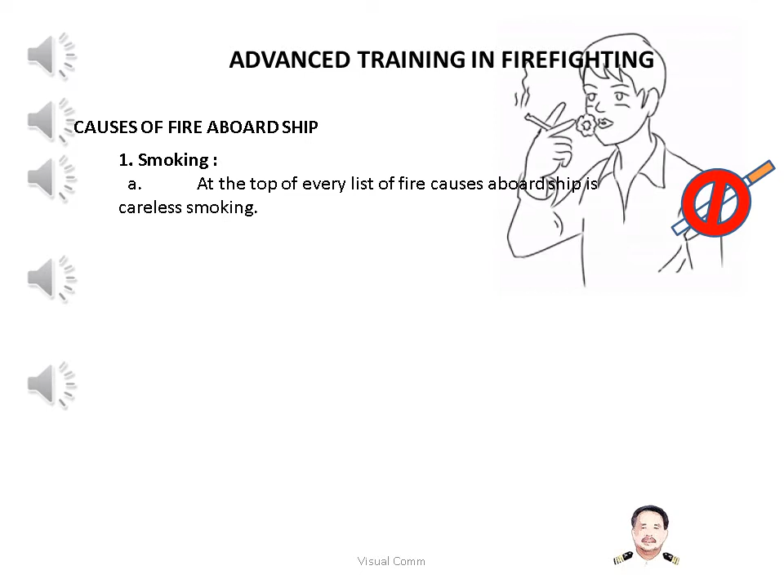1. Smoking. At the top of every list of fire causes aboard ship is careless smoking - careless disposal of lit cigarettes, cigars, pipes and matches. Smoking in bed is dangerous at any time. A smoldering fire can be started just by touching the glowing cigarette to the bedding. The resulting smoke can cause drowsiness and possible asphyxiation before the fire is discovered.

Open flames and glowing embers can be very dangerous in certain parts of the ship. Smoking must be prohibited in these spaces, and they should be clearly marked as no smoking areas. Smoking in cargo holds and weather decks when the hatches are open is strictly forbidden.

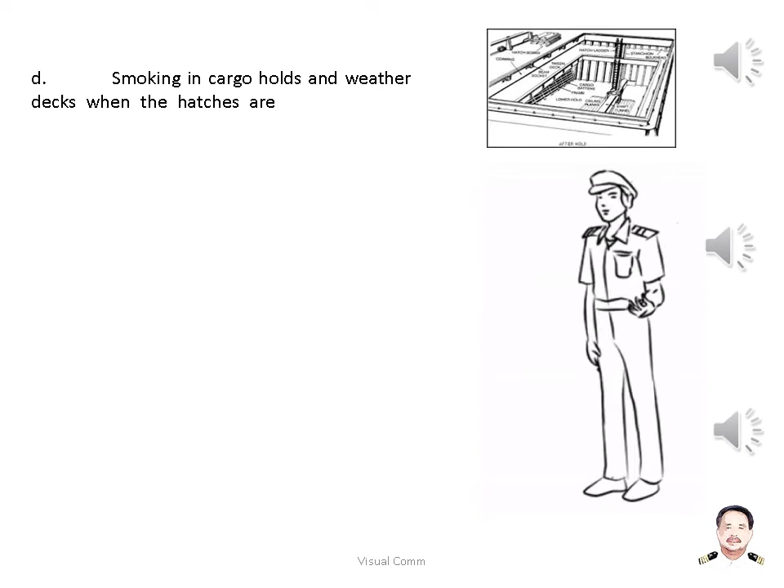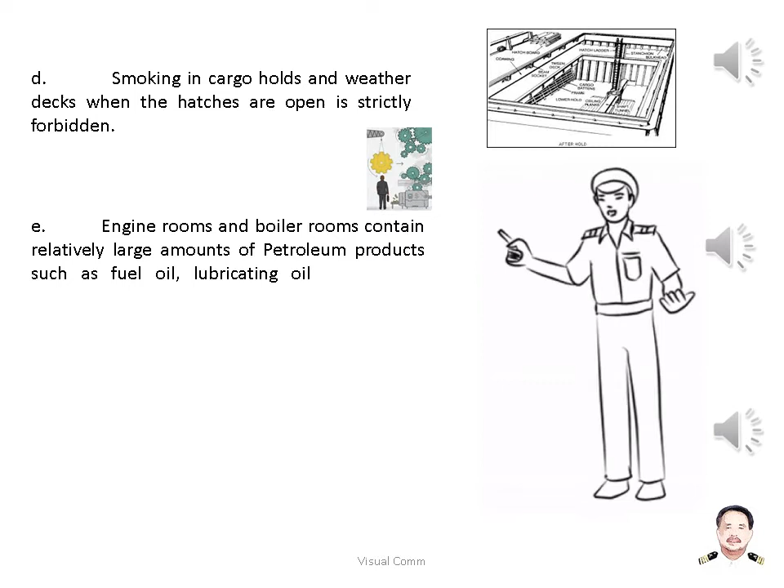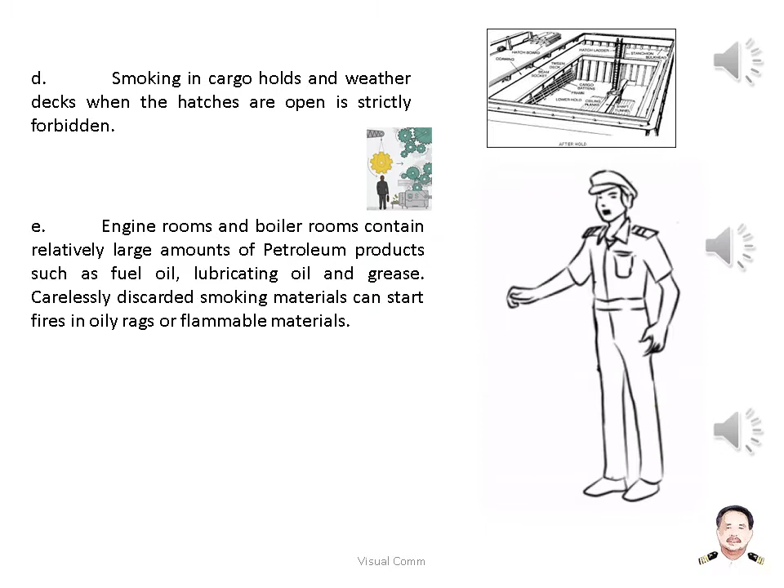Engine rooms and boiler rooms contain relatively large amounts of petroleum products such as fuel oil, lubricating oil and grease. Carelessly discarded smoking materials can start fires in oily rags or flammable materials. Smoking should be prohibited in storage rooms and workspaces. These spaces contain large amounts of flammable materials.

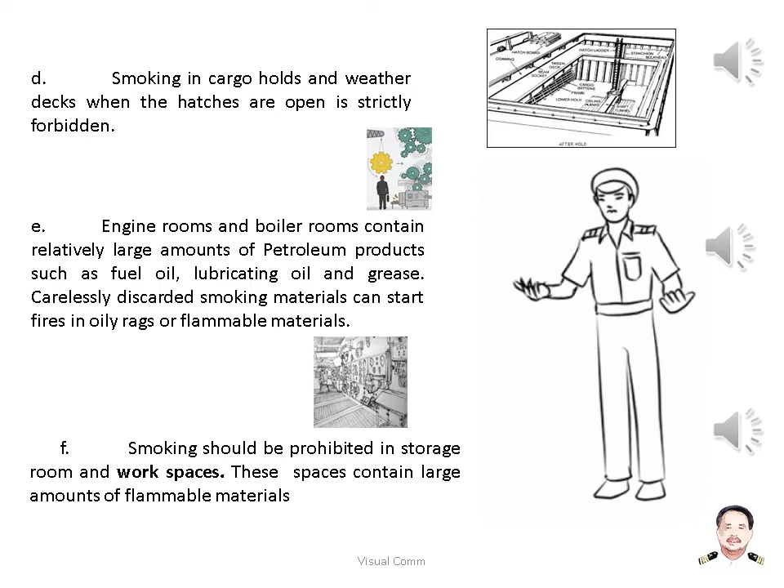2. Spontaneous combustion occurs when the heat of slow oxidation is confined until the materials reach a temperature sufficient for ignition. An example of this is when a rag soaked in oil is left discarded in the corner of a workshop or engine room. If the area is warm and there is no ventilation, the oil in the rag starts to oxidize and reacts chemically with oxygen. Oxidation is a process that produces heat.

3. Cargoes. Many materials that are carried as cargo are subject to spontaneous combustion. Ignition occurs through the chemical interaction of two or more substances, one of which is often air or water. Metals sodium and potassium react with water, and must be segregated as flammable solids and labeled dangerous when wet.

Metal powders such as magnesium, titanium, calcium and zirconium oxidize rapidly in the presence of air and moisture. Keep dry and segregated as flammable solids and labeled dangerous when wet.

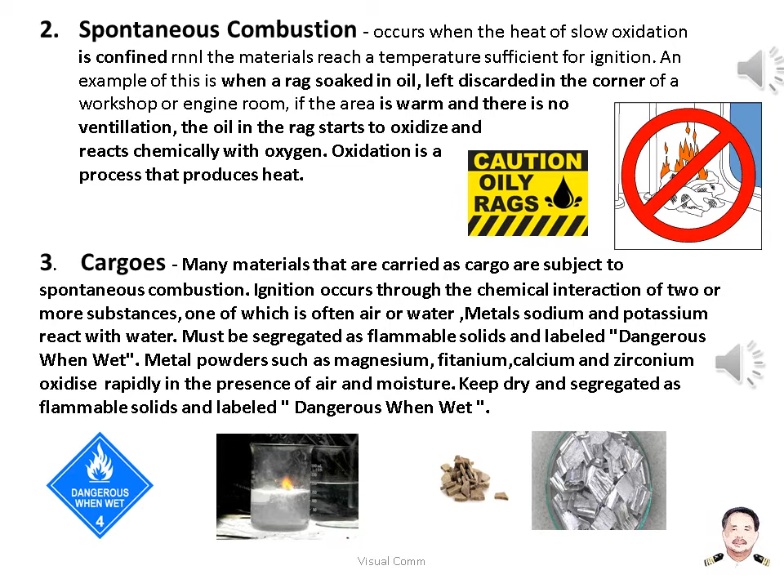4. Faulty electric circuits and equipment. For properly insulated and wired equipment, electricity is a safe and convenient source of power. However, when electrical equipment wears out, is misused or is poorly wired, it can convert electrical energy into heat, thus a fire hazard.

5. Jury-rigging electrical outlets to serve additional appliances, particularly in crew's quarters and galleys, is a dangerous practice. The wiring in every electrical circuit is designed to carry a certain maximum load. When the wiring is overloaded with too many operating appliances, it can overheat and burn its insulation.

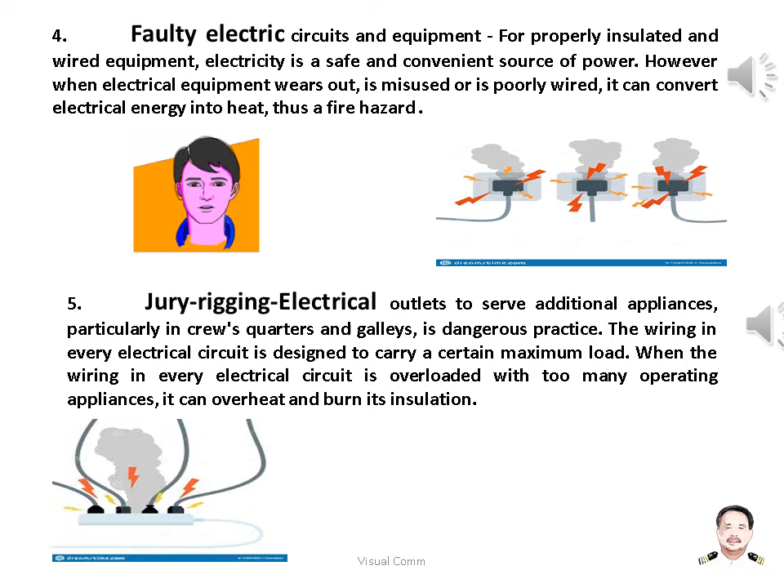6. Cargo stowage. Even the most dangerous cargo can be transported safely if it is properly stowed. On the other hand, supposedly safe cargo can cause a fire if carelessly stowed.

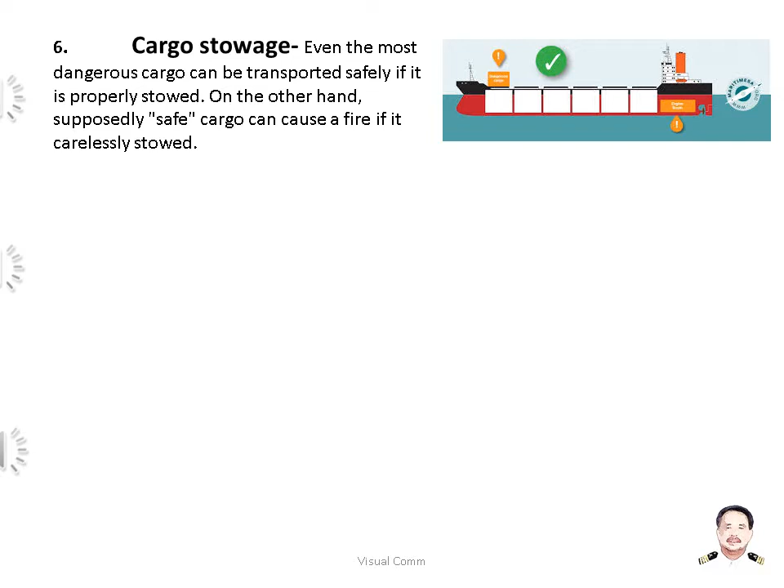7. Loading and unloading operations. These should be supervised by the deck officers. Leaking cargo should be rejected immediately. Remember, a vegetable oil that leaks onto baled cotton or rags could cause spontaneous combustion.

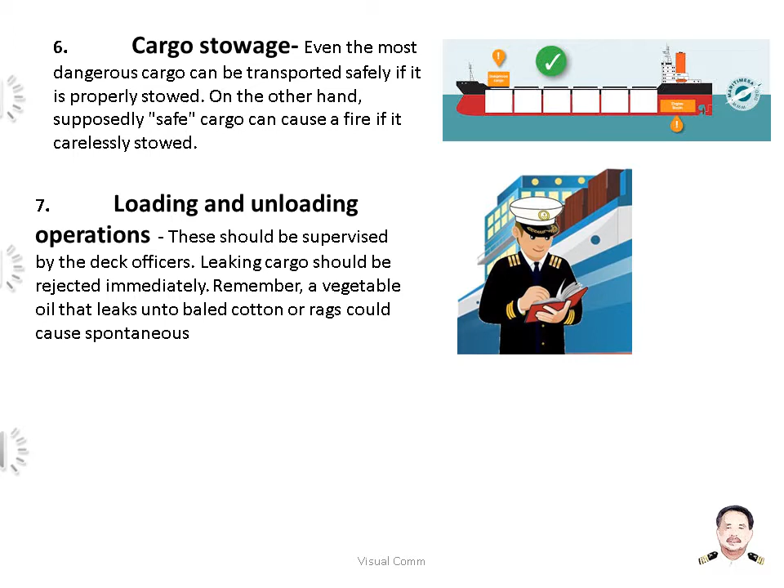8. Galley operations. The galley is a very busy place. The intense activity, long hours of operation, the many people and the basic hazards - open flames, fuel lines, rubbish and grease accumulations - all add to the dangers of fire. It is extremely important that the galley must never be left unattended when it is in use.

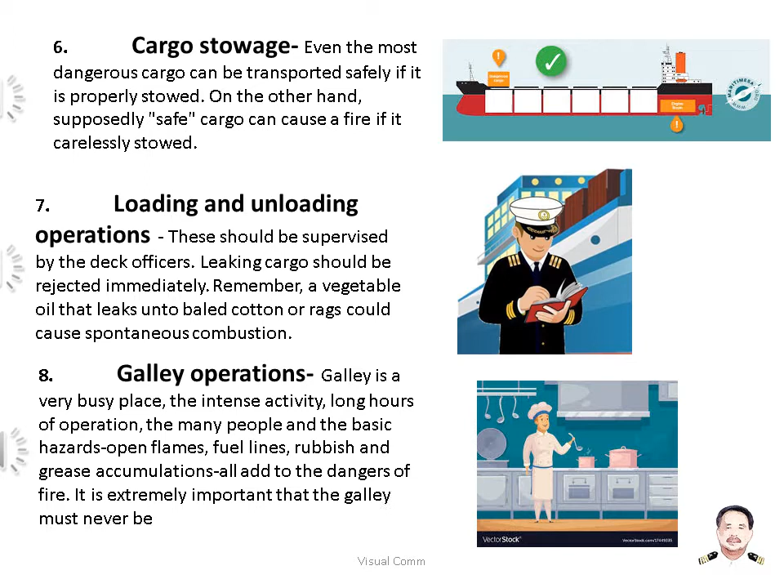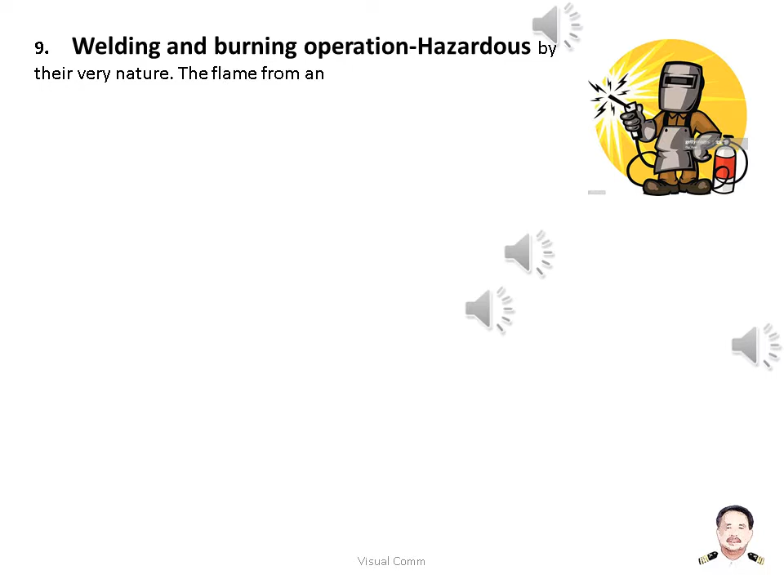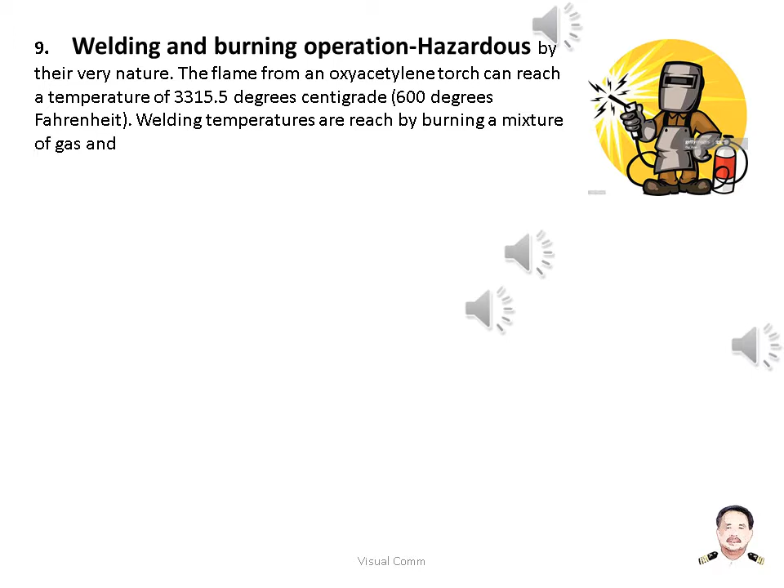9. Welding and burning operations are hazardous by their very nature. The flame from an oxyacetylene torch can reach a temperature of 3,315.5 degrees centigrade (6,000 degrees Fahrenheit). These high temperatures are reached by burning a mixture of gas and oxygen or by using electricity. The high temperatures, molten metal and sparks produced in welding and burning operations can be an extremely serious fire hazard. A fire watch must be maintained during operation.

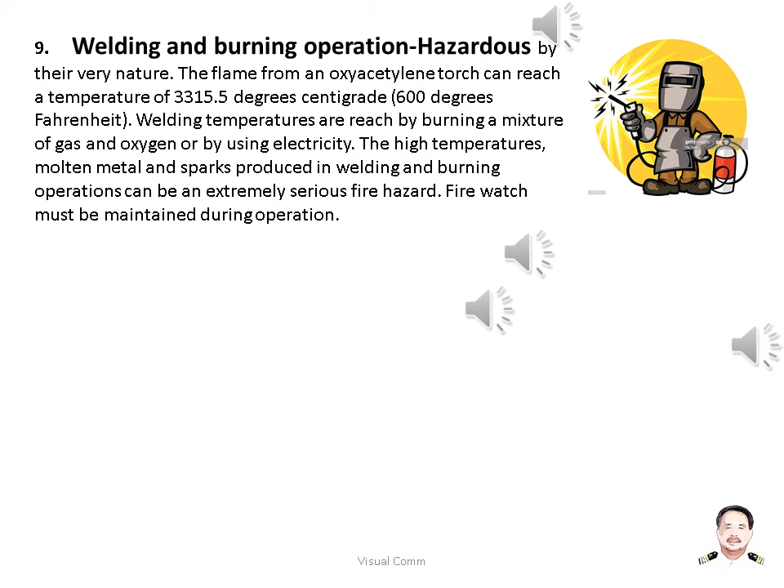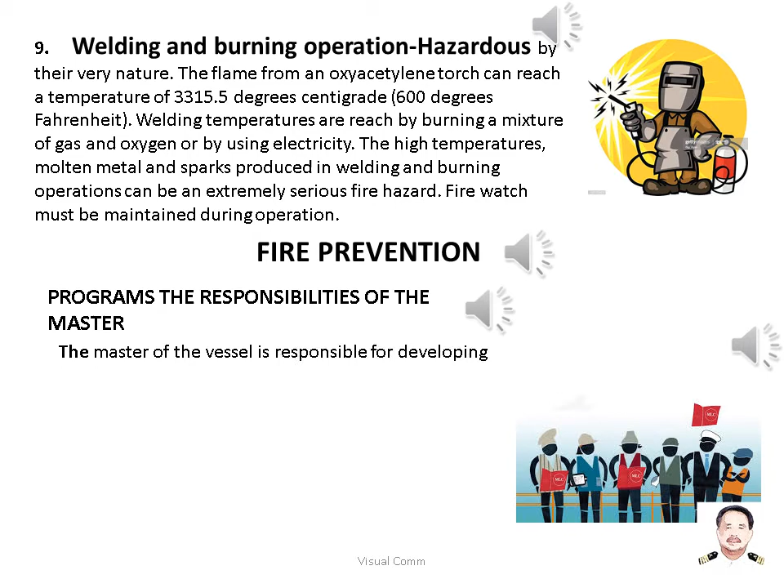Fire prevention programs: the responsibilities of the master. The master of the vessel is responsible for developing the attitudes and cooperation required for the best operation of the ship. This responsibility extends obviously to fire safety.

During formal meetings, formal discussions, casual conversations and training sessions, the master should convey his concern for fire prevention. There should be no doubt that he wants a fire-safe ship, and that he expects every member of the crew to assist in reaching this goal.

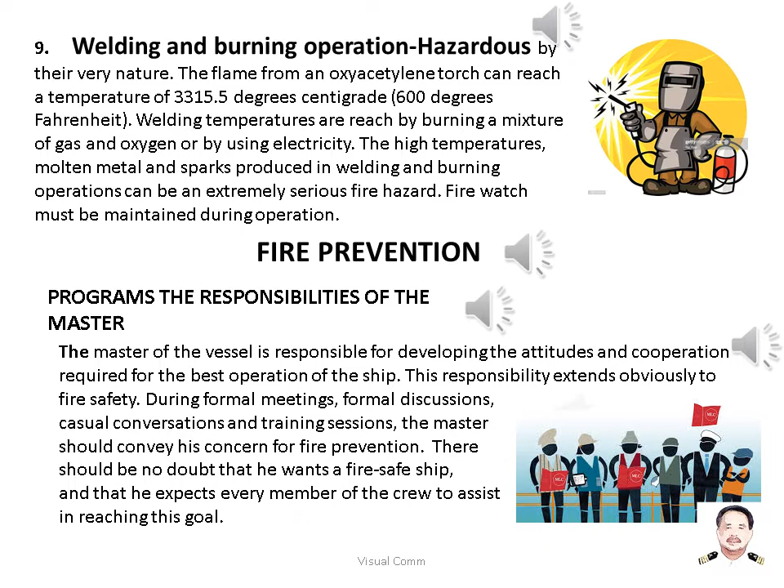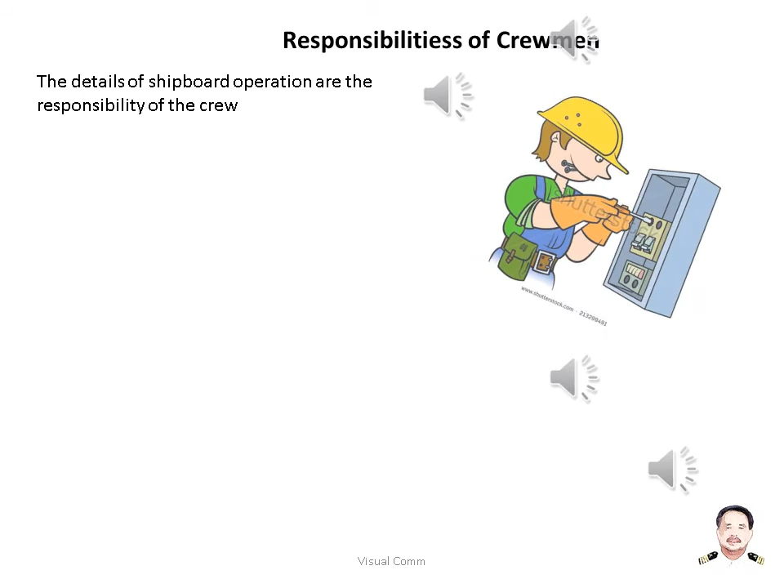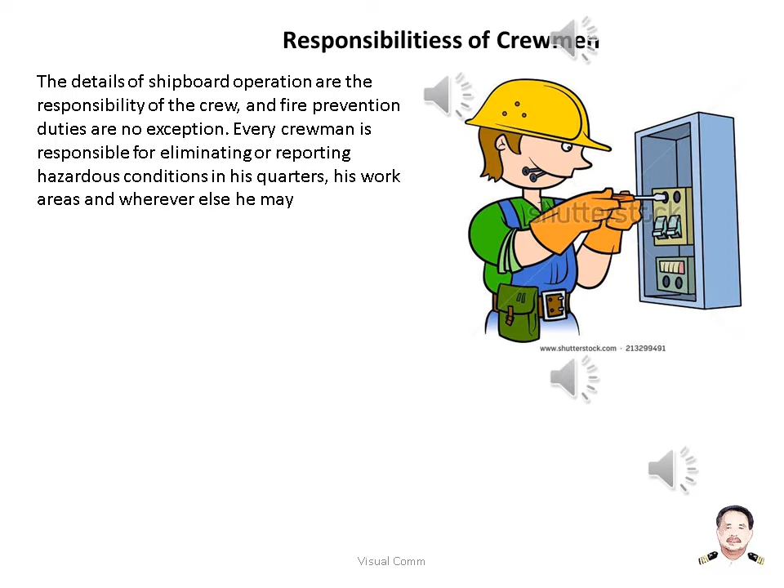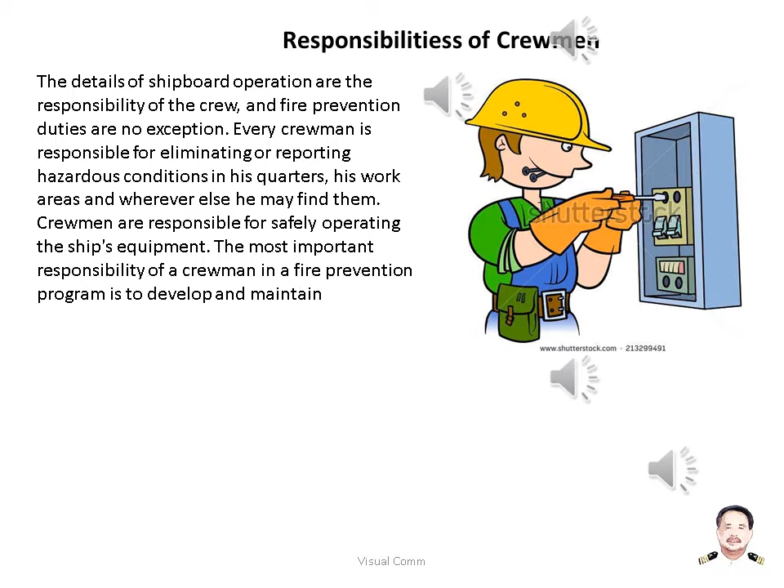Responsibilities of crewmen. The details of shipboard operation are the responsibility of the crew, and fire prevention duties are no exception. Every crewman is responsible for eliminating or reporting hazardous conditions in his quarters, his work areas and wherever else he may find them. Crewmen are responsible for safely operating the ship's equipment. The most important responsibility of a crewman in a fire prevention program is to develop and maintain the proper attitude. The crewmen who are interested and involved in the program will make it work.

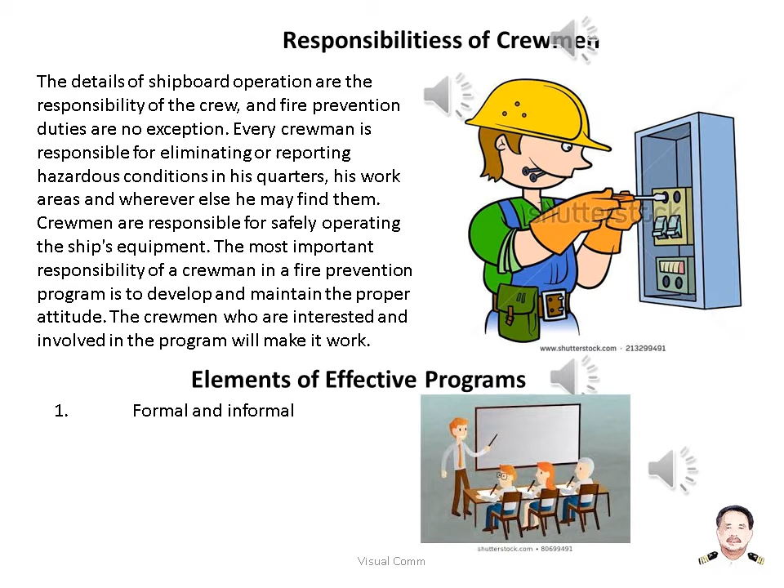Elements of effective programs: 1. Formal and informal training. 2. Periodic inspections. 3. Preventive maintenance and repair. 4. Recognition of effort.

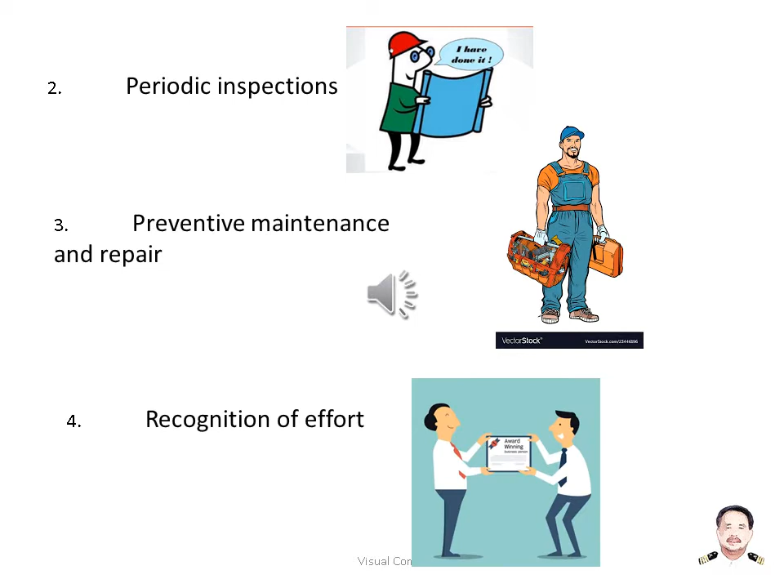Training curriculum. The training should be focused primarily on the prevention of fire, secondarily on the fact that different classes of fires require different extinguishing agents.

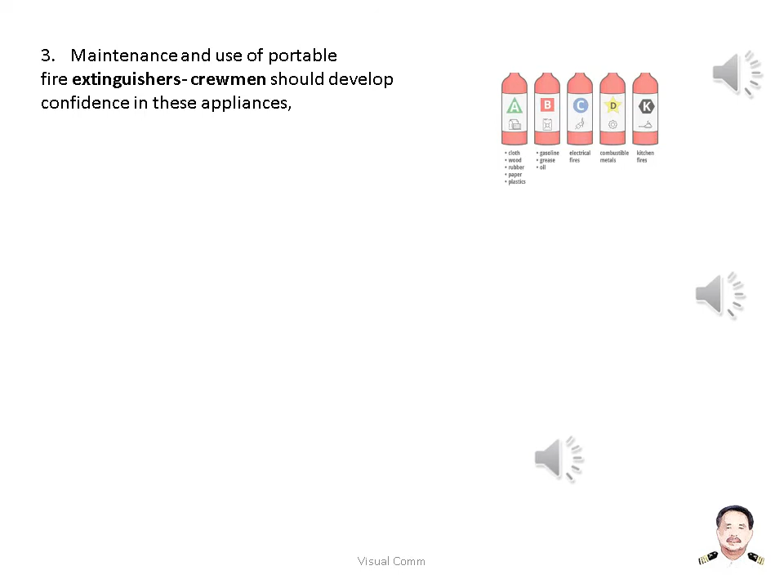Three: Maintenance and use of portable fire extinguishers. Crewmen should develop confidence in these appliances. They should check to see that fire extinguishers are in their proper places, in good condition, and ready for use.

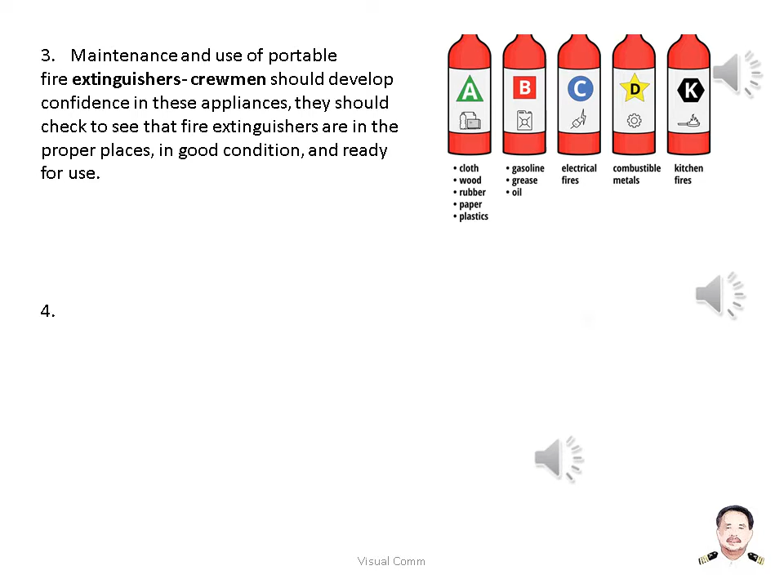4. Good housekeeping. Basically this means cleanliness. Examples are listed below.

A. Cleaning rags and waste should be stored in covered metal containers. B. Accumulations of oily rags should be placed in covered metal containers. C. Accumulations of packaging materials should be disposed of properly.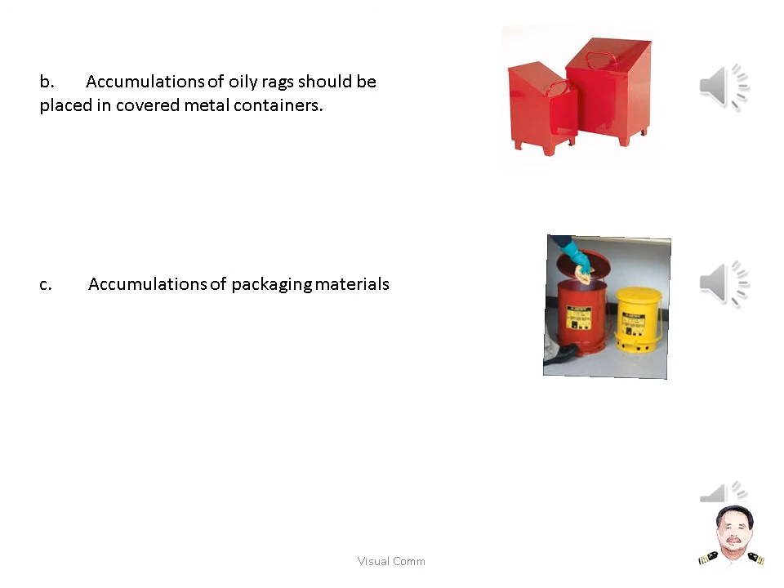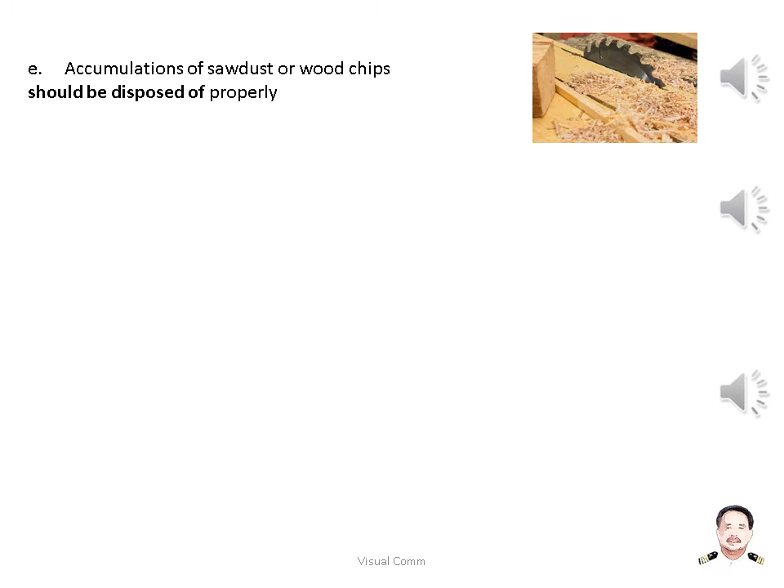D. Dunnage should only be stored in the proper area. E. Accumulations of sawdust or wood chips should be disposed of properly. F. Oil-soaked clothing should never be stored in crew's lockers.

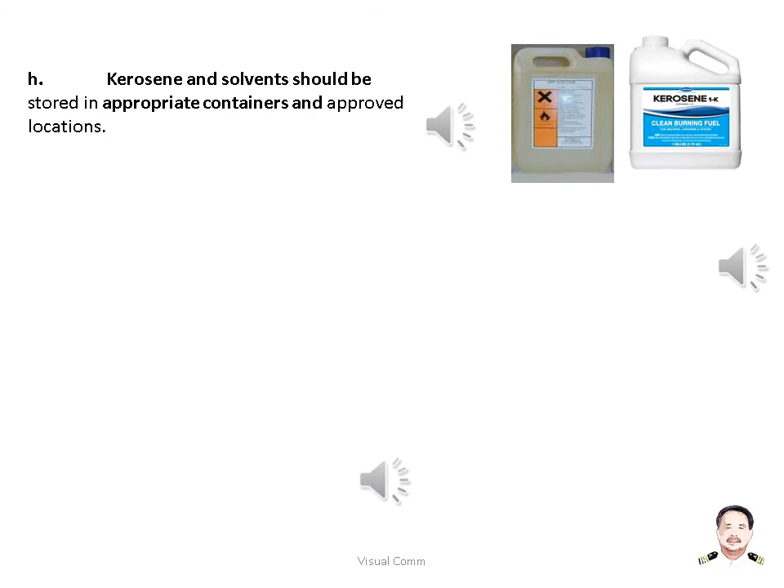G. Paints, varnish and so forth should be stored in paint locker. H. Kerosene and solvents should be stored in appropriate containers and approved locations. I. Oil-soaked clothing should not be worn by crew members. J. Avoid soot accumulations in boiler uptakes and air heaters.

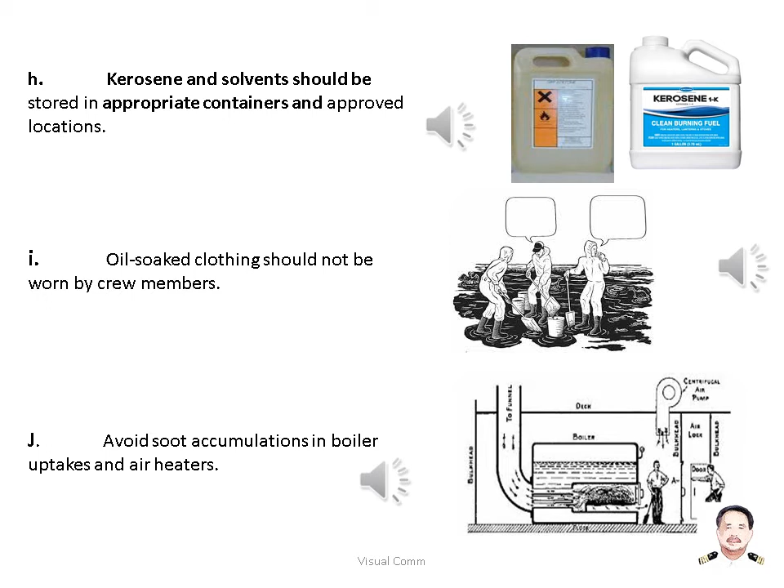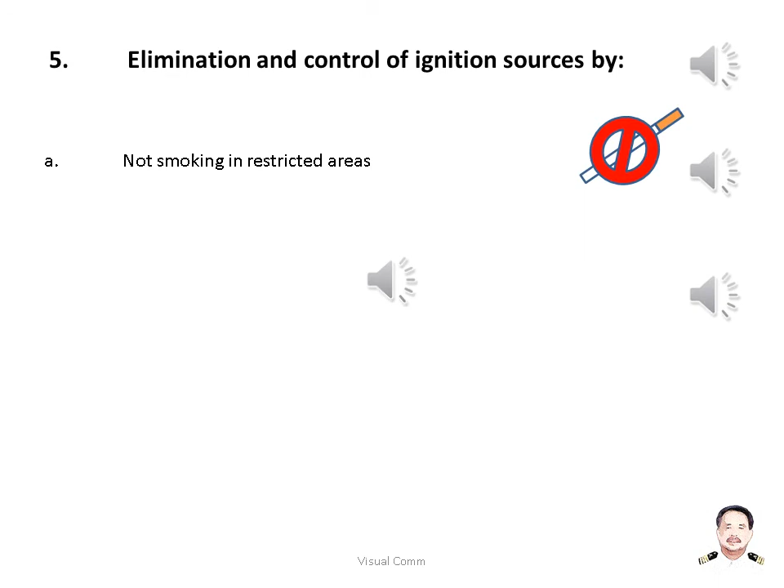5. Elimination and control of ignition sources by: A. Not smoking in restricted areas. B. Not overloading electrical circuits. C. Keeping flammable materials clear of pipes.

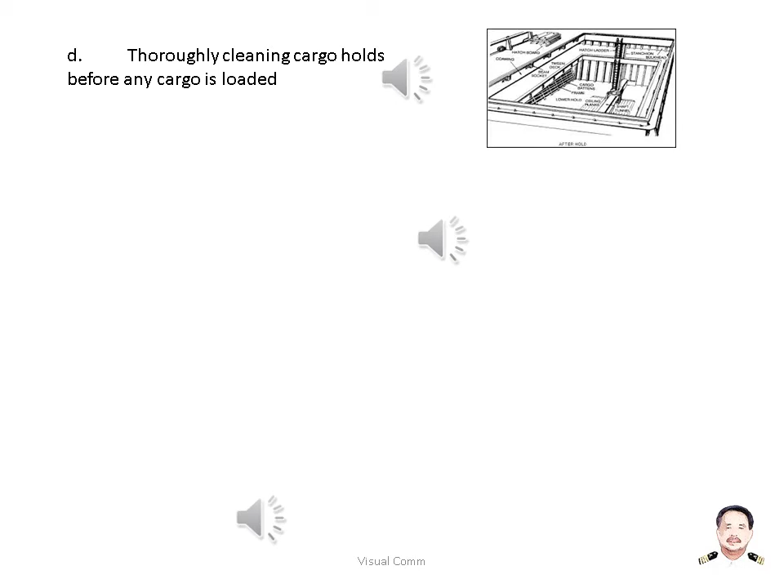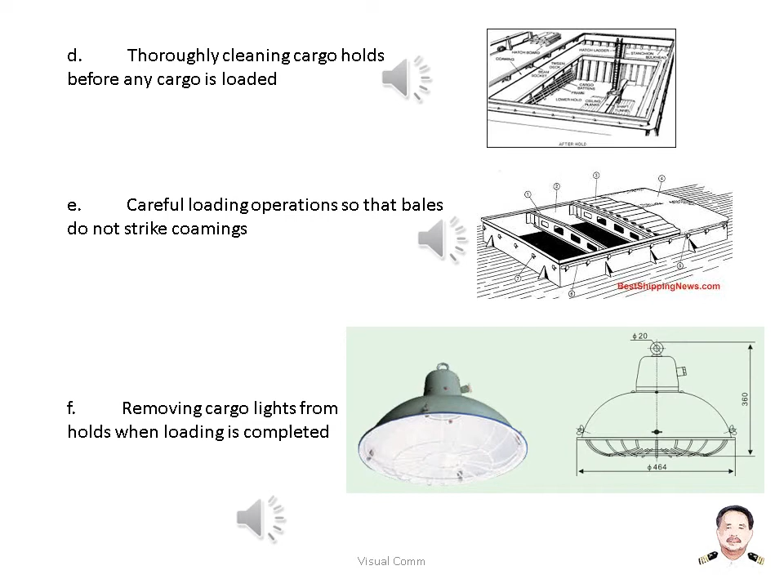D. Thoroughly cleaning cargo holds before any cargo is loaded. E. Careful loading operations so that bales do not strike coamings. F. Removing cargo lights from holds when loading is completed. G.

Observing all precautions when welding or burning, including the posting of a fire watch. H. Eliminating the causes of static electricity. I. Awareness of the possibility of spontaneous combustion.

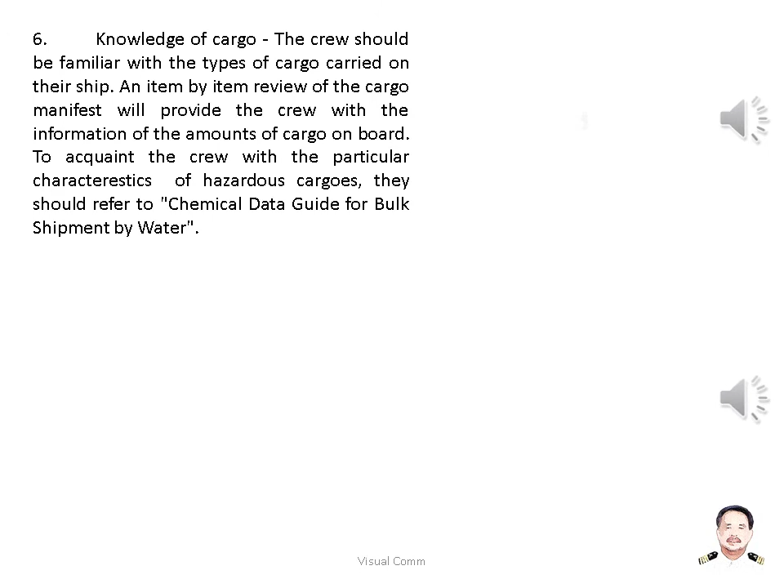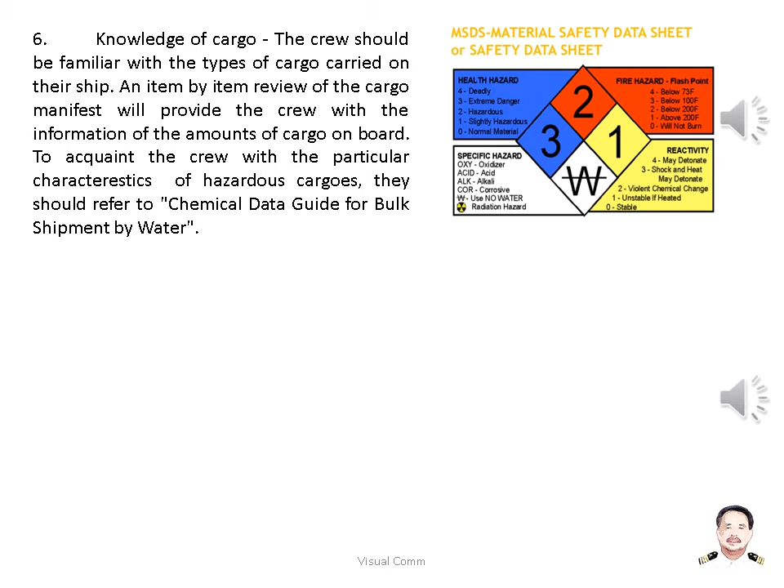6. Knowledge of cargo. The crew should be familiar with the types of cargo carried on their ship. An item-by-item review of the cargo manifest will provide the crew with information on the amounts of cargo on board. To acquaint the crew with the particular characteristics of hazardous cargoes, they should refer to the Chemical Data Guide for bulk shipment by water.

Periodic inspections. Inspection is one of the most important parts of the shipboard fire prevention program. Its purpose is to find and eliminate fuels and ignition sources that could cause fires. The master, chief officer and chief engineer should make a formal joint inspection of the entire ship at least once a week.

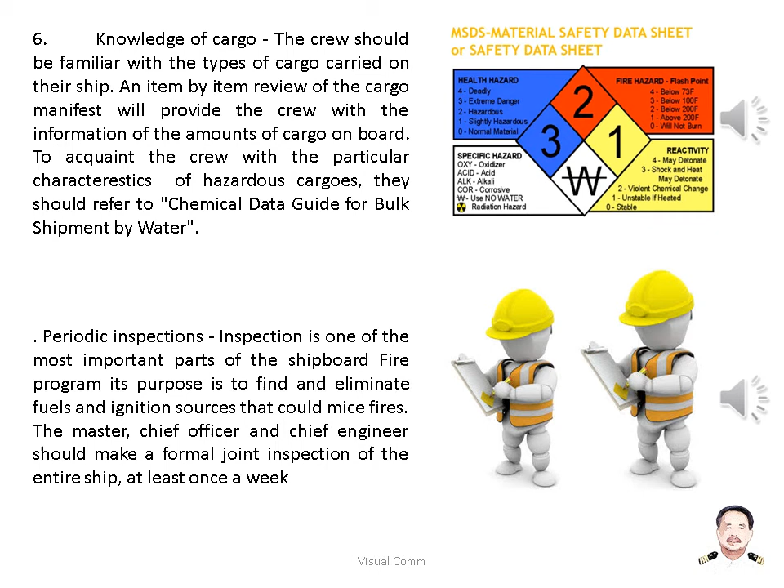7. Requirements prior to repair and inspection. United States Coast Guard regulations in Title 46 CFR require inspections before riveting, welding, burning or such fire-producing operations are undertaken in certain portions of the vessel. They also require that the provisions of NFPA Standard No. 306, Standard for the Control of Gas Hazards on Vessels to be Repaired, be used as a certified guide.

Regulations state that the inspection be made by a marine chemist. The master, chief officer and chief engineer should be familiar with the services of marine chemists and the certificates they issue.

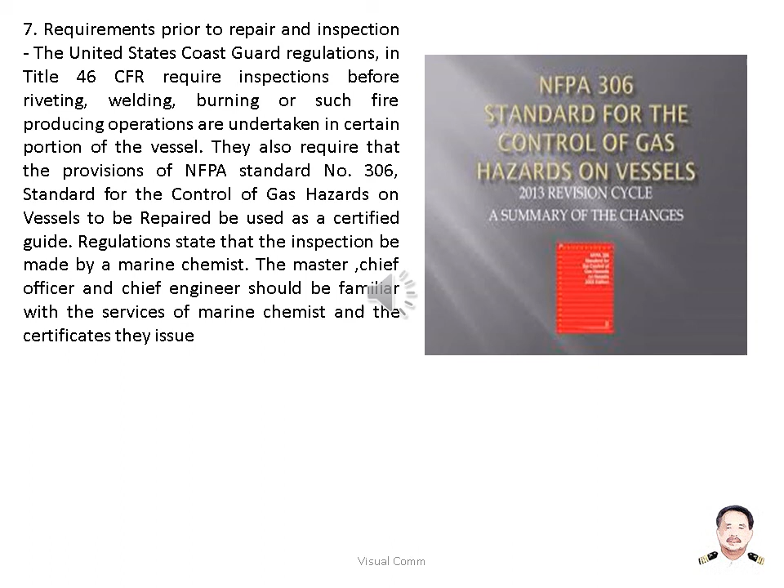Safe for men condition is defined as follows: A. The compartment contains at least 18% oxygen by volume. B. Toxic materials are within permissible concentrations. C. If the area is maintained as directed, residues will not produce toxic materials.

Availability of testing instruments. A. Combustible gas indicator: determine whether there is a flammable atmosphere in any area of a vessel. B. Flame safety lamp, used to test only for oxygen deficiency. If there is enough oxygen in the surrounding atmosphere to keep the flame burning, there is enough oxygen to support life.

C. Oxygen indicator. It has the advantage of being equipped with a meter so that the actual amount of oxygen in the atmosphere can be determined. The instrument can also be used to determine whether a normally inert gas is free of oxygen, that is, contains less than 5% oxygen.